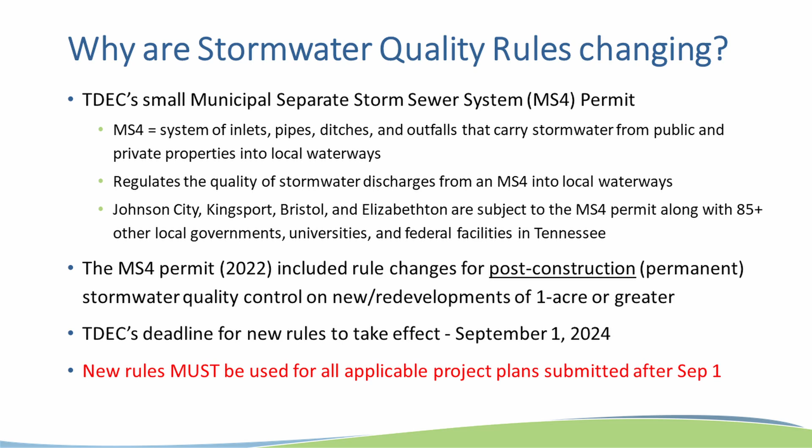So the 2022 permit included rule changes that bring us to this point. Those rule changes had to do with new developments and redevelopments that were an acre or greater of land disturbance. The deadline that TDEC set for the municipalities was September 1st to make those rule changes. I'm not sure that everyone met that September 1st deadline exactly, but generally those ordinances have been revised and adopted, and as of that adoption date, any plans that you submit after need to meet these new requirements that I'm going to show you today. So it might not be September 1st in every community - consult the community's ordinance or the community itself, and they'll let you know.

So the objectives of a stormwater ordinance in general are really to establish the local authority and the project applicability for who needs to manage stormwater. So you're going to see what projects are applicable to these requirements, what land disturbances are exempt. The ordinances also adopt by reference any other guidance or policies or things that are not placed in the ordinance - those are named in the ordinance. All of the ordinances for the jurisdictions in this room adopt by reference the Tennessee Construction General Permit.

Most ordinances refer to the permit for erosion and sediment control requirements. They refer to the Tennessee Erosion Control Handbook for how to design those erosion control measures, and then to the local SCM Water Quality manual, the one revised for stormwater quality and channel protection requirements. Your ordinances may also reference other manuals like public works standards or other handbooks for localized standards. So the purpose of an ordinance isn't necessarily telling you how to do everything, but telling you what you need to do and where to go to understand how to do it.

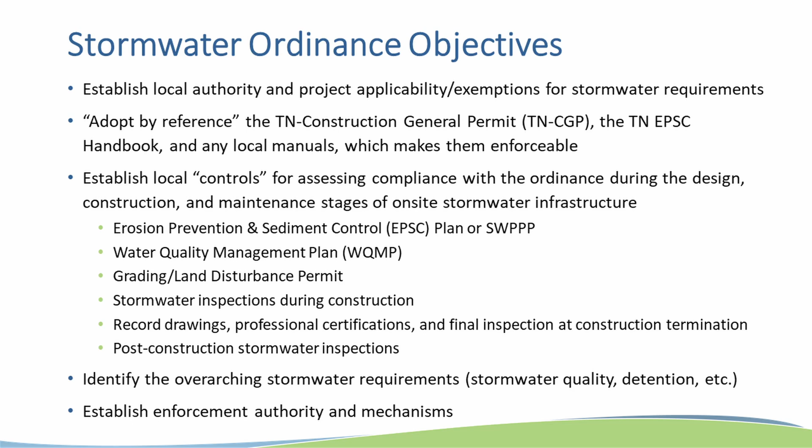Finally, and importantly, ordinances establish the enforcement mechanisms in case of failure to comply with the ordinance. Those are also required much more prescriptively by the 2022 MS4 permit now, so you may see a few changes on the compliance side as well.

When you look at a stormwater manual, whether it's the water quality SCM manual, public works standards, or what have you, that's where all the methods, calculations, equations, and design specifications really are. So it's going to explain what those design performance standards are, what the measuring stick is that you have to meet, and it's going to explain or reference the hydrologic and hydraulic methods you need to use to do that.

This water quality SCM manual doesn't provide a lot of typical engineering methodology, such as how to do NRCS runoff hydrograph generation. This manual assumes, like many other manuals, that as an engineer you can go to an engineering text and learn how to do that. It does, however, provide some information on stormwater quality volume calculation, which is typically not in an engineering text, not something we all learned in engineering school. So it will establish minimum specifications for the design of stormwater control measures, SCMs. I'll talk about SCMs a lot more in a minute.

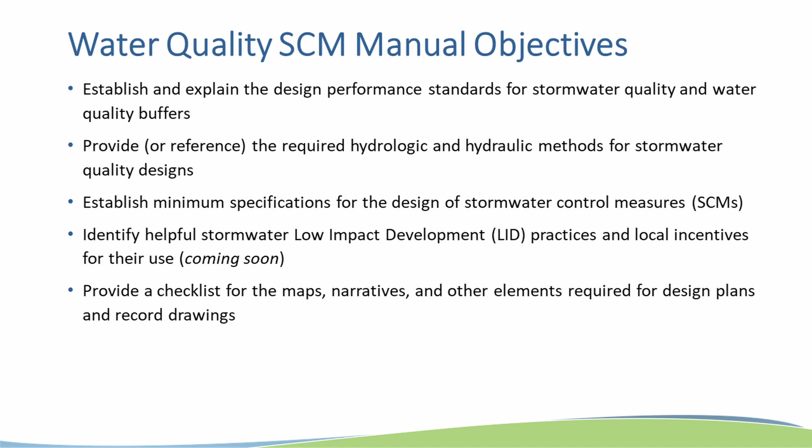It also talks about some helpful low-impact development practices and local incentives coming soon for those practices. Low-impact development practices, from a stormwater perspective, are ways that you can reduce the generation or reduce the volume that flows off of your site through site design planning measures and infiltration or capture and reuse practices. We'll talk about those a little more in a minute. The manual also provides checklists for the development of your plans, with a narrative on what to provide, how to provide it, what scale, and things like that. You'll find all of those things in the manual.

The new water quality SCM manual is simply a revision of the old water quality BMP manual. The state changed our terminology. A BMP no longer refers to a post-construction stormwater measure. The terminology stormwater control measure, or SCM, now refers to the post-construction stormwater facility you put out in the field. So it's a stormwater quality SCM manual. It deals only with water quality and channel protection, not detention. It's got the same table of contents as before. We revised only the sections that needed revision, as well as updated the SCM design requirements.

Still the same manual. You'll find it on your local websites, local government websites.

The typical regulatory framework for local stormwater rules is a city code of ordinances, parsed out by chapters or titles, with various pieces dealing with erosion and sediment control and the permitting associated with that, which then lead into post-construction stormwater management and water quality buffers. A lot of times the permitting will be cited close to the erosion control section of the ordinance, but will have an overarching requirement for that permit. That permit, usually a grading permit or a land disturbance permit, is typically what then leads into your permanent stormwater management and buffer requirements. So for every jurisdiction in the room, you're just getting one permit, land disturbance or grading, but under that permit you're typically satisfying requirements in all three of these areas.

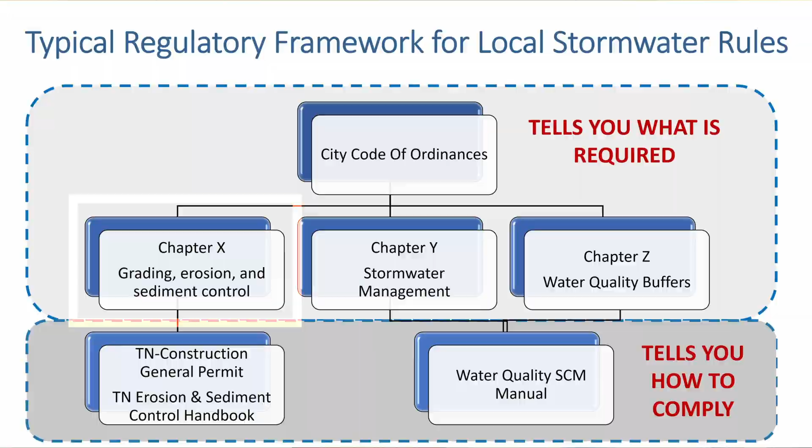Now, as far as local design standards, this table was in the old water quality BMP manual, and it's the same table in the new water quality SCM manual. Stormwater quality treatment for these four communities has been 80% TSS removal of the water quality volume since 2007, 2008. That has not changed; that standard is exactly the same. The state went after that standard, and that's now the state standard, 80% TSS removal. Downstream channel protection has been the runoff volume from the 1-year, 24-hour storm event, extended detention of that, and that has not changed. Your detention and extreme storm management requirements will vary by jurisdiction. Just go to the ordinances and the local standards, and they'll let you know what those are.

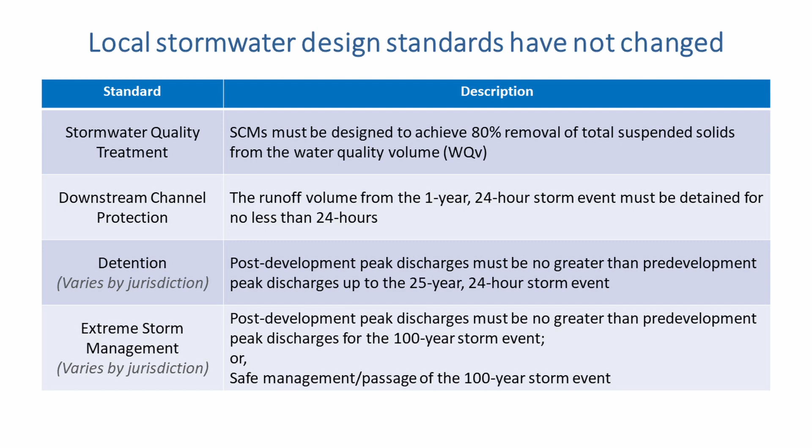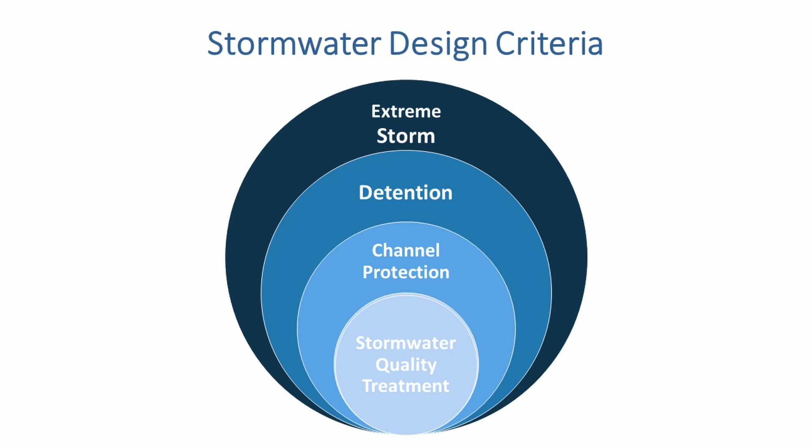This bullseye graphic was in the old manual, and it talks about how, if you choose to, you can nest your design compliance into a single SCM. That is still true, though not necessarily always the way you'll go depending on the project. The volume you control for stormwater treatment can also account for some of the volume you deal with for channel protection, and retaining those volumes can also be situated into your detention feature for flood control and extreme storm management. So that has not changed.

One thing that has changed under the new state permit is that the stormwater quality treatment volume changes depending upon the SCM you decide to use to control stormwater quality. It used to be we just managed 1.1 inches or thereabouts, typically through an extended detention pond with a water quality orifice, and maybe a grass channel upstream to get your 80% TSS removal. What's changing in this new manual is the amount of volume you have to control and the way you show compliance for that control. So let's get into that. We'll talk about stormwater quality treatment and channel protection standards, and some terminology—probably should have put this at the start.

Post-construction or permanent stormwater management is the removal or control of pollutants from stormwater after construction is complete. So construction's done, that business or residential area is occupied now for whatever it was created to do. We still have the requirement under Tennessee state law and under their permits to control stormwater quality from the smallest volume of water. That's called the water quality treatment volume.

Total suspended solids, or TSS, is the parameter the state chose to be an indicator for the reduction of pollutants in stormwater. That has been the indicator these 4 communities have used since 2007, 2008. The water quality volume is the required volume of water that must be controlled for stormwater treatment. That's not changed. The amount of what that volume is has changed.

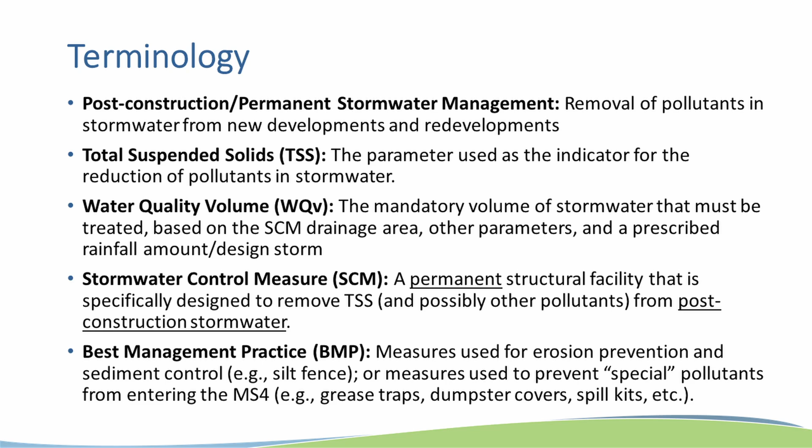As I said, stormwater control measure is now what we call the permanent stormwater quality facility that's on site. Best management practice is still a term that's out there. BMPs can be either erosion and sediment control measures, or when you're talking about permanent stormwater, for a special pollutant site, maybe you've got petroleum, fuel containers. A BMP would also be a measure to control or not expose those special pollutants to stormwater when it rains. So BMP now is changed a little bit to either stormwater control, erosion and sediment control, or a no exposure or point source control - a dumpster cover, an enclosed trash facility, an enclosed transfer facility, things like that.

So before I tell you about the new way, I want to remind you about the old way. For stormwater compliance, the old method, our performance standard, was 80% TSS removal of pollutants from the water quality volume. So removal of TSS from the water quality volume.

We had this equation, the water quality volume equation that we used, where P is the rainfall depth or precipitation depth - that was 1.1 inches or thereabouts. RV is a factor that has to do with the imperviousness of a site, kind of like a curve number, or a C factor in the rational method. I in the RV equation was your impervious percentage over the whole site.

And then impervious percentage in the SCM drainage area. And A was the drainage area to the SCM.

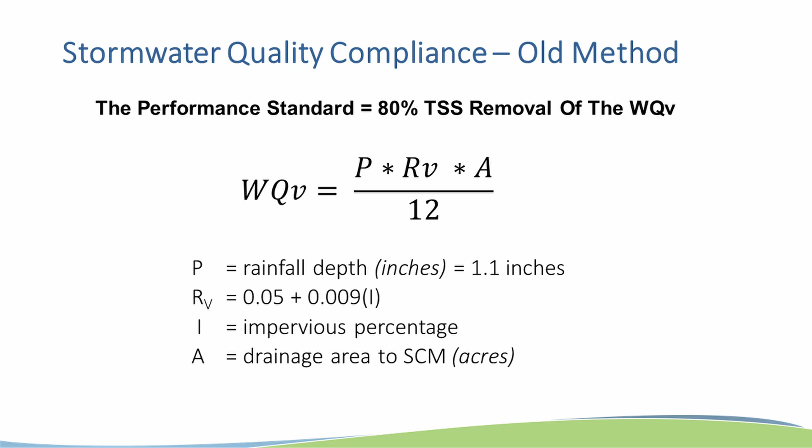So if you had 2 SCMs on a site, you would work this out twice, one for each drainage area, where area A would be the drainage area to SCM1 and SCM2, and I would be the impervious percentage of the drainage area to SCM1, and then impervious percentage for SCM2. So that was the required volume you had to meet.

And then you designed SCMs, or BMPs, to control that volume of water to 80% TSS removal. So what that looked like would be, let's say, an extended detention pond that controlled that smallest volume, that 1.1 inches of rain, the water quality volume. That extended detention pond got you maybe 60% TSS removal. So more than likely you had to put a grass channel or something upstream to get you to 80% TSS removal. But your pond profile tended to look something like this, where you had water quality volume, channel protection volume for the 1-year storm event, and then your detention volumes all up the riser.

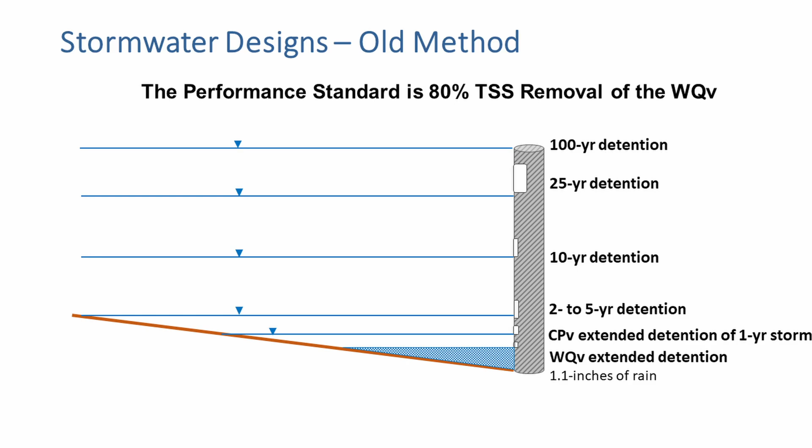So some of that has changed. As of September, that design standard of 80% TSS removal of the water quality treatment volume is the same. Most of the SCMs that were in the old manual are now in the new manual. Things that you're not going to see are things like grass channels. And I'll explain why in a few minutes.

And then a lot of the policies that were in the water quality SCM manual have stayed the same. As I said, the design specifications have changed a little bit, but by and large I think you're going to see that they're pretty much the same. The checklist, all of those things are still in there.

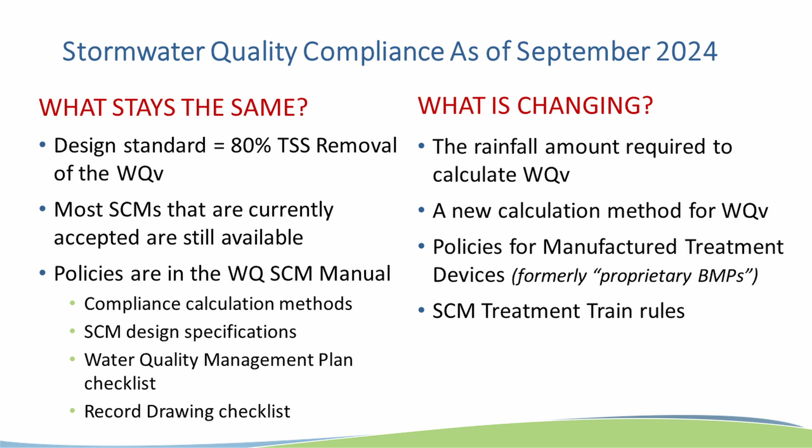What's changing is the rainfall amount that is required to calculate that water quality treatment volume. There is a new calculation method in addition to that water quality volume equation for determining the water quality volume. There are new policies for what we used to call proprietary BMPs - they're now called manufactured treatment devices. And there are new requirements for SCM treatment trains if you get to the point of needing one. Most of you, I think, will not get to that point. So the main table you're going to be looking at in the new manual is the SCM treatment table.

The SCMs are now divided into different groups. There's 4 different groups, and each group has a different treatment mechanism, so how it treats stormwater quality. Group 1 treats stormwater quality.

These are the true green infrastructure or low impact development SCMs, where you've got infiltration, evapotranspiration, or rainfall harvesting and reuse. So things like a cistern or a bioretention area without an underdrain. What you're doing is capturing that water quality volume and you're not allowing it off the site.

That's group 1. Group 2 is still green infrastructure, still considered LID. It uses biologically active filtration, but it has an underdrain. So this would be a bioretention area where you don't have the capacity or the soils to infiltrate. So you're going to biofilter and evapotranspire that water in the bioretention area, but that water quality volume you treated is going to go out through an underdrain to the storm sewer system. So it's cleaner water going out.

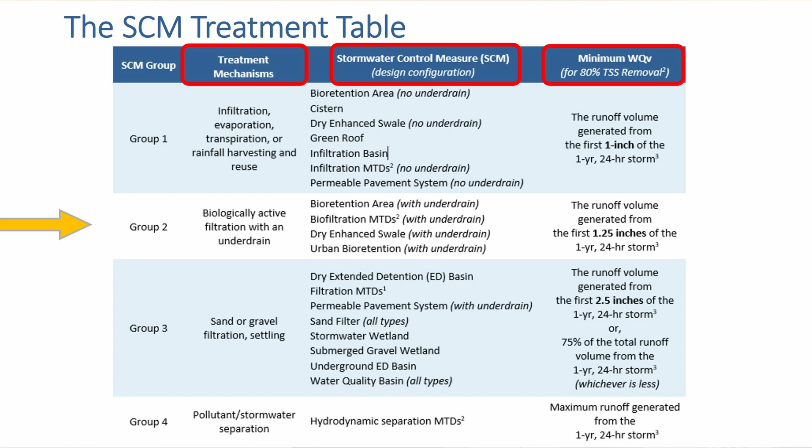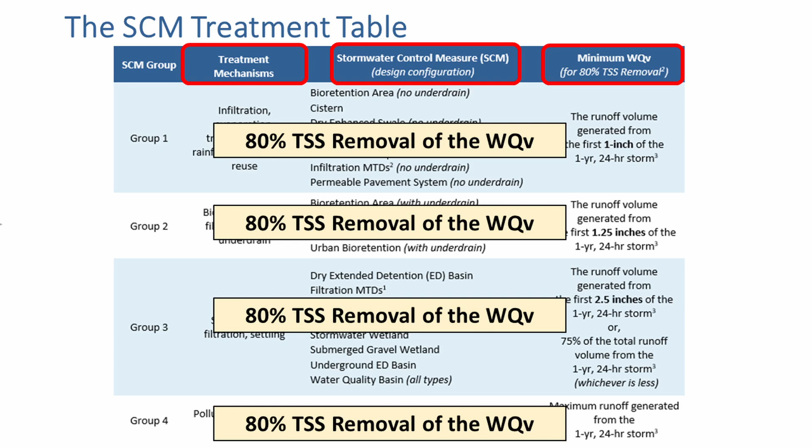So if you read this table, each row gives you 80% TSS removal. So now if you pick a dry extended detention basin, as long as you size it to one of these two choices for the water quality volume, then you're meeting 80% TSS removal. You don't need to do anything else for water quality. So you read it by row. Each row constitutes 80% TSS removal. The water quality volume and the type of SCM, that's what is varying.

Looking again at the old method, the old way since 2008 of doing this, we would have put that dry extended detention pond and sized it for 1.1 inches, but that didn't give us a total TSS removal of 80%. We had to put something upstream of it, so maybe we chose a grass channel or a hydrodynamic separator or something like that. We also sized that for that same water quality volume. We put these in series, and out the end, you had 80% TSS removal.

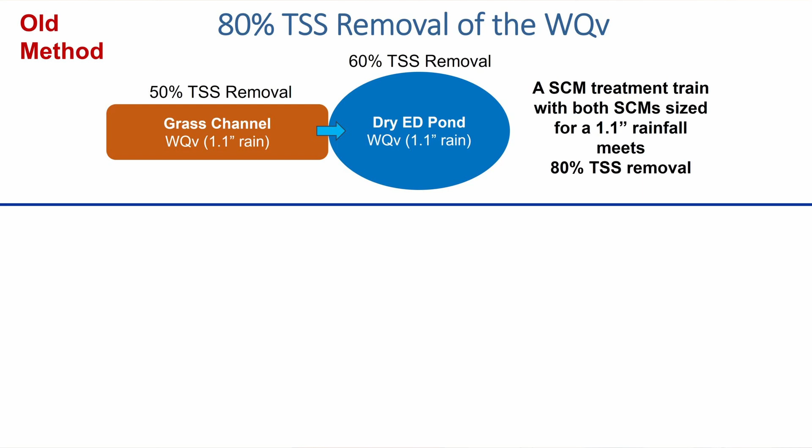That's not the way to do it anymore. What you do now is you size that dry extended detention pond for the water quality volume of 2.5 inches of rainfall, or 75% of the volume from the one-year storm, and you've got 80% TSS removal. You don't have to stack a treatment train anymore.

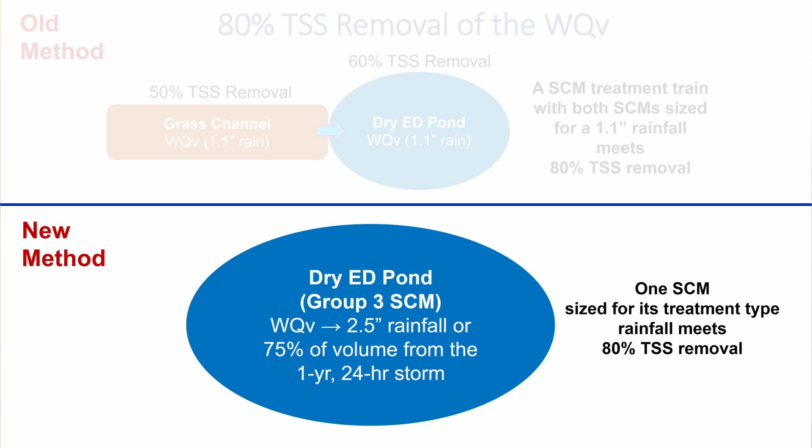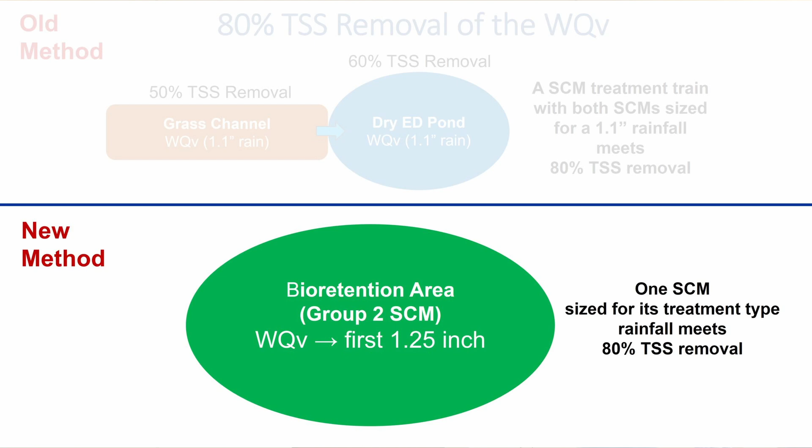However, if you decide that's a bioretention area and you want that instead of an extended detention pond, then you only have to control the first 1.25 inches to get 80% TSS removal. Now, you still have to do channel protection and detention downstream of that bioretention area, but in your detention pond that's downstream, you don't have to worry about the water quality volume. You've already dealt with that through your bioretention area. Does everyone understand that?

That's the big change. It takes a little getting used to because you're used to thinking of trying to get 80% by finagling your SCMs. Now you just choose one SCM, and if you can size it properly and design it according to the manual, you're good to go.

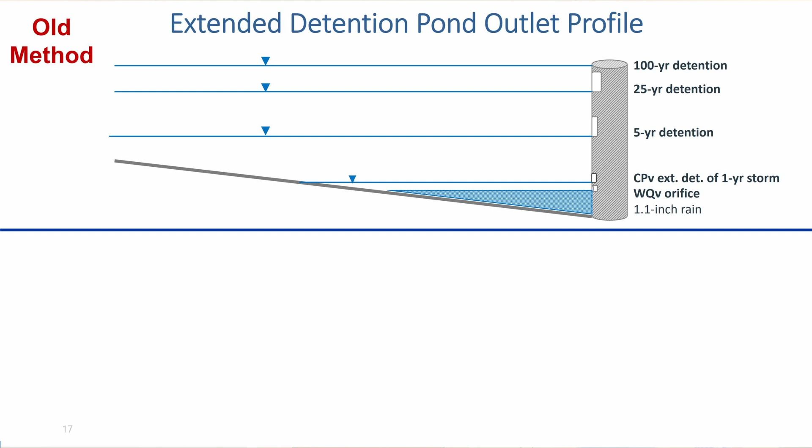So this takes our old extended detention pond profile, and it does change it, because we have a lot more water now in an extended detention pond that we're controlling for water quality volume.

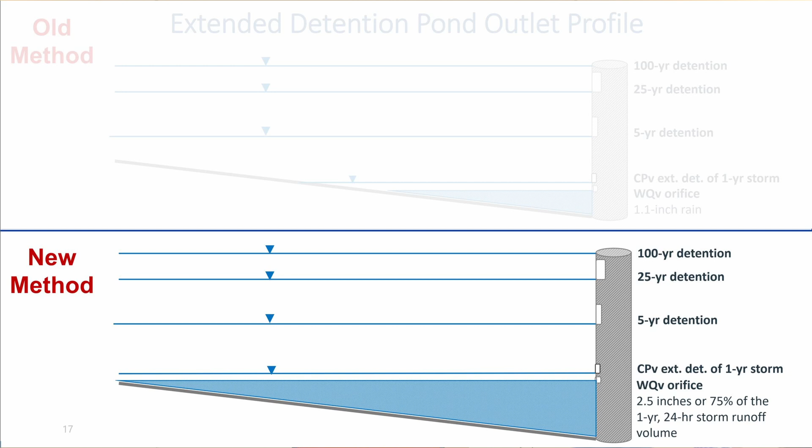Now, backing up a little, the reason TDEC did this is because not all SCMs are created the same. They're not all as efficient as each other in removing pollutants from stormwater.

The SCMs in a group 1 situation, where none of the water quality volume runs off site, are the most efficient. You've got basically 100% pollutant removal since that volume isn't going off site. In group 2, they're very efficient, so you only need to do 1.25 inches and you get that 80% TSS removal. As you drop down to groups 3 and 4, these are a lot less efficient.

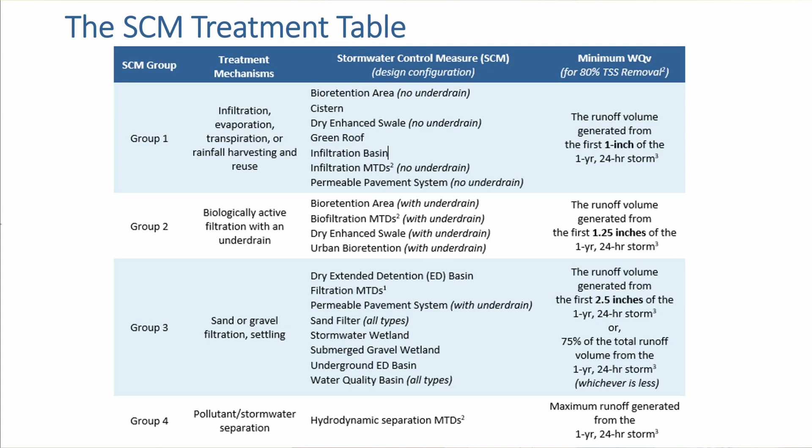So instead of dealing with different pollutant removal percentages, what TDEC did was say, okay, we'll just make you control a larger volume, so that controlling a large volume in a less efficient SCM is roughly equivalent to controlling a small volume in more efficient SCMs. That's what TDEC was thinking in order to come up with this scenario. It just flips on its head how you get to 80% TSS removal.

Okay, so you still have the option of using that water quality volume. That does have a name, by the way — it's called the simple method. The changes are here in red, kind of hard to see. You use the rainfall depth from the treatment table to determine your P, your precipitation depth. The RV is still the same, the imperviousness is still the same.

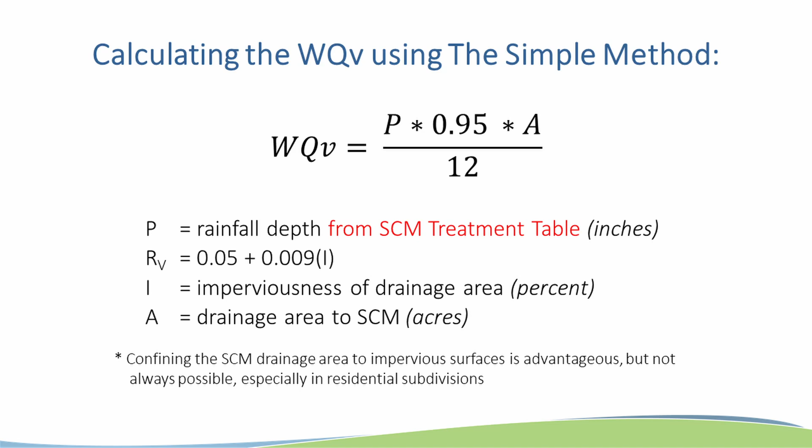One thing the permit does, and that the new manual does, is encourage you to try to keep your drainage area to the SCM 100% impervious. On a commercial site that tends to be easier to do than on a residential subdivision, since you've got a lot of intermixed stormwater coming off pervious and impervious areas. But if your drainage area can be confined simply to impervious area, then your imperviousness is 100%, and the equation works out a little easier.

That's also a change the permit allowed — just controlling the impervious surfaces on your site from a stormwater quality perspective. Now, as an engineer, if that SCM is receiving stormwater from both pervious and impervious areas, then your equation needs to include both, because it needs to be sized for the drainage volume it's receiving, from a water quality perspective on up through detention. So if you have pervious area going in, make sure that's reflected in this equation.

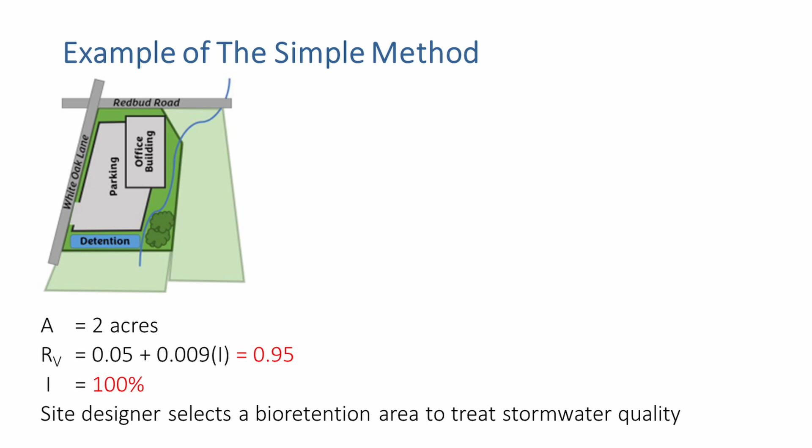An example of that: we have a very simple development here, an office building and a parking lot. For example purposes, let's say I can get everything over to a bioretention area here, and I'm not running off any pervious area. So my area is 2 acres, I have 100% imperviousness, so my RV is 0.95. I've selected that group 2 bioretention area.

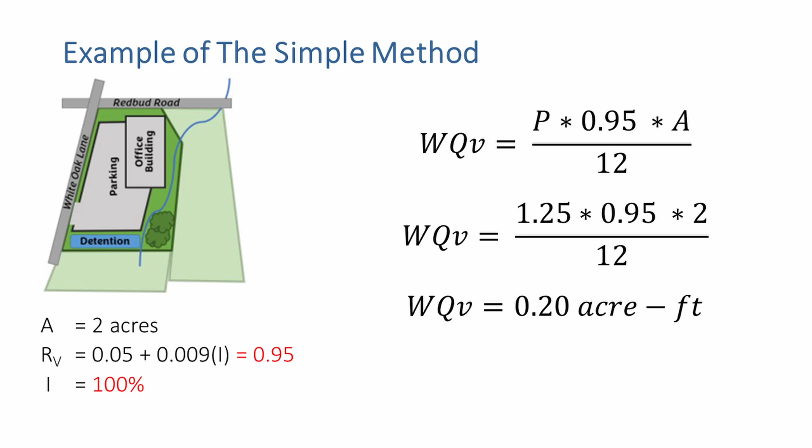I'm going to say it has an underdrain, so I know I need to calculate my water quality volume based on the first 1.25 inches of rainfall. I stick my 1.25 inches into that equation. We're not really dealing with timing in this method — that's where the simple method kind of breaks down, since it's technically the first amount of runoff you'd see, but we're not dealing with the timing of the stormwater here. I've calculated my water quality volume to be 0.2 acre-feet, okay.

Another thing we've been doing all along when using the simple method is making sure we understand the water quality peak discharge, the QWQ parameter. That's been in the manual for a long time, but I've heard from a lot of engineers who didn't realize they had to do that. You do have to do that — you have to determine the peak flow from your water quality event, or the peak flow from that water quality volume, so you can size the different flow diverters, outlets, inlets, and so on for that SCM.

You'll also need to route that peak flow through the smallest portion of the SCM, to make sure it won't be overwhelmed by your water quality volume. There is a full calculation method in Chapter 3 of the Water Quality SCM Manual.

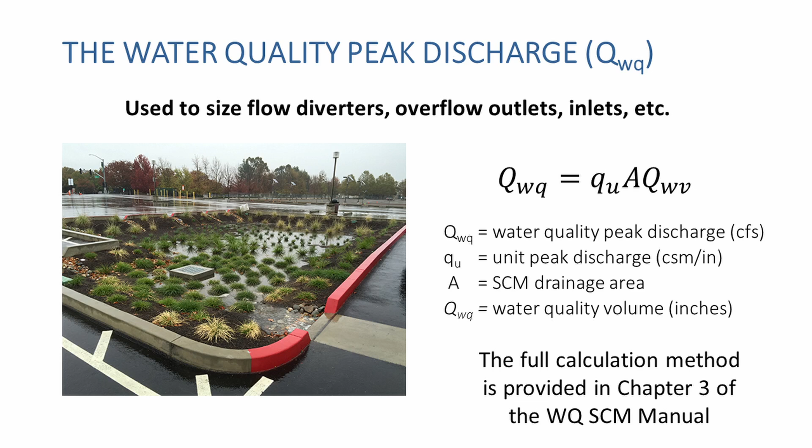It's not changed from the method that was there previously. I just wanted to point this out and make sure you are aware you need to determine the water quality peak flow and make sure your SCM is sized for that peak flow. Even if it's an offline SCM, it's got to be able to handle the water coming into it.

There are more equations than just that one. That's the ending equation, but if you go in the manual, it'll show you how to come up with all those parameters.

There is a second method to determine the water quality volume and the water quality peak flow. This is a method you're all familiar with, the NRCS hydrograph method. So you're going to do your typical NRCS hydrology, finding curve numbers, time of concentration, etc. Your design storm is that 1-year storm.

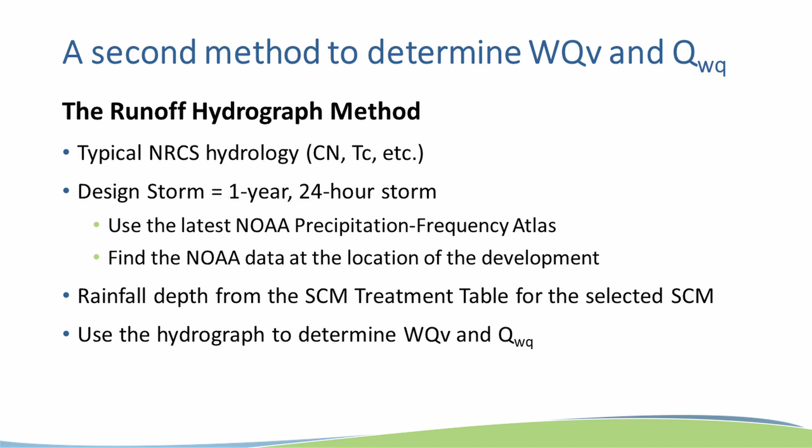You have to use the latest NOAA precipitation frequency atlas, it's number 14 right now for that data. In Johnson City, for all the other storms that you're controlling, you're going to use Technical Paper 40. But for all the other jurisdictions, let me back up - in Johnson City, you have to use NOAA for the water quality treatment volume, but Technical Paper 40 for all of the other design requirements.

In the other communities, you're using NOAA, or they'll let you know if there's something different. But the state mandates that the NOAA rainfall distribution or the NOAA rainfall information be used for the water quality volume.

You're going to get that rainfall depth from the SCM treatment table for the selected SCM that you have, and you'll use the hydrograph that's generated to determine your water quality treatment volume and your peak flow.

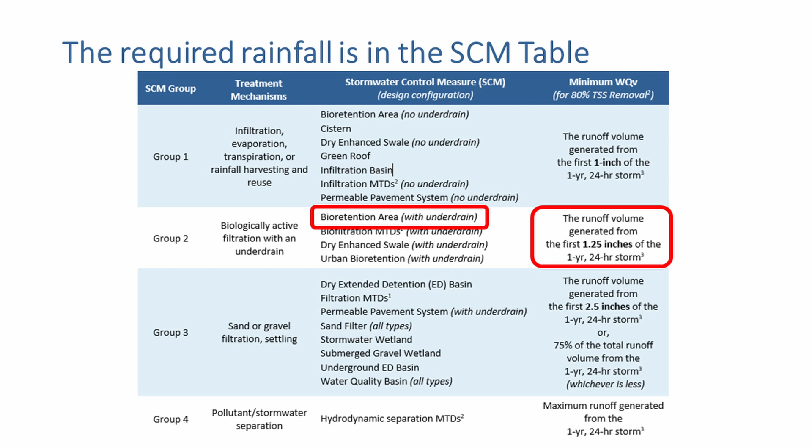So using that same example, the design professional is going to go ahead and develop their required NRCS parameters, and then we'll just plug that into our software using the NRCS TR55 method to come up with our runoff hydrograph. I'm going to say we've gone ahead and chosen that same bioretention area with an underdrain, a Group 2 SCM.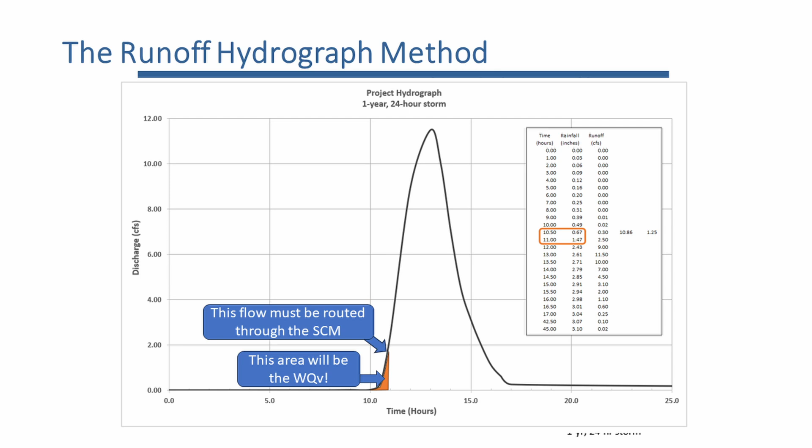So the volume under that tiny little slice is your water quality volume. The peak discharge is the peak right there. So that's the flow that must be routed through the SCM and used to size diverters and things like that. The design specifications in your manual will tell you how to size what.

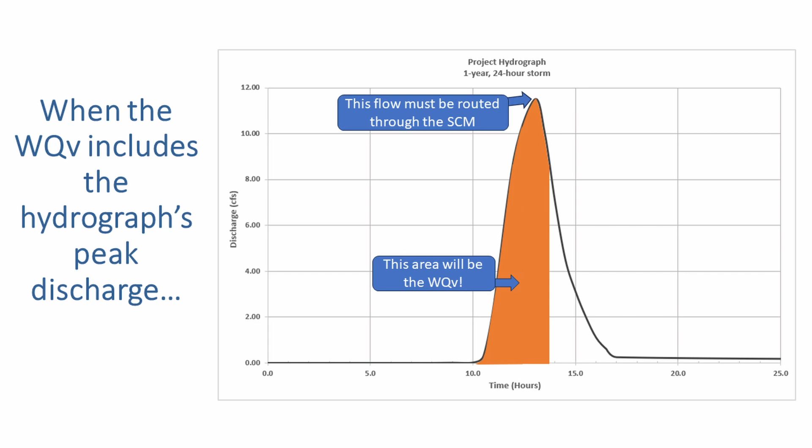So when the water quality volume passes, the timing of it passes the peak of the 1-year storm hydrograph, then the volume under that larger area is the water quality volume, and the peak of the hydrograph is what must be routed. So it just depends on what's going on your site to know whether you're past peak or before peak. But you have to pay attention to whether you're past or before in order to understand what your water quality peak flow is.

So this is the way that TDEC prefers. We allow both ways in these communities. Just know that if TDEC ever were to get involved, they'd probably want to see this. I don't know why that would be, but...

Now, one thing I want to point out, you've probably already noticed, Group 3 SCMs - extended detention ponds, permeable pavements, sand filters, wetlands, your storage features - they're all considered Group 3 SCMs, and you have a choice. You can either design that for the first 2.5 inches of that 1-year storm or for 75% of the total volume of that storm. Just do whichever you prefer. Typically, that's going to be whatever is less.

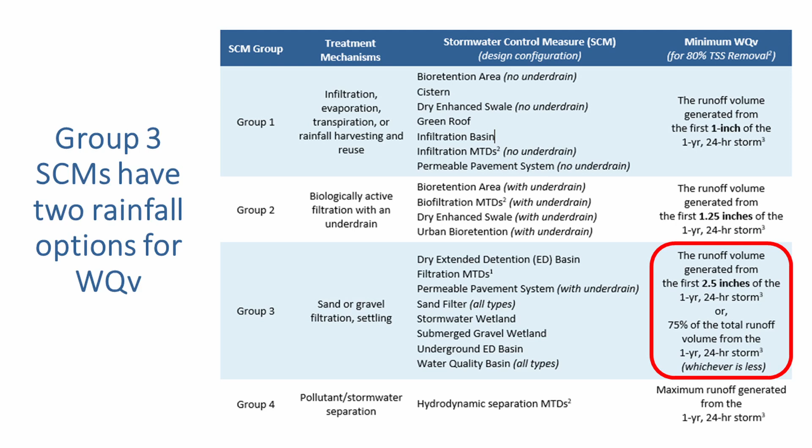So again, let's say you chose to use 2.5 inches and it comes out with this. You've got that volume that you need to determine for the water quality volume and then the peak flow. But let's say you decide to use 75% of the 1-year storm, then you're going to get the volume, the total runoff volume under the hydrograph. So all of that, but just multiply it by 0.75. So 75% of that volume then is your water quality volume.

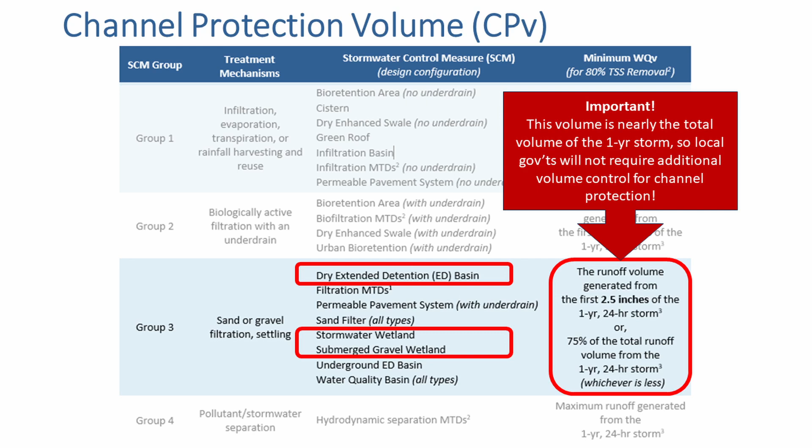A little give-back you're getting from the Tri-Cities communities is that they recognize the volume you're controlling, especially when working with storage features like a stormwater wetland, extended detention pond, or submerged gravel wetland. By the time you've done water quality volume, you're about as close as you're going to get to your channel protection volume, it's very close in size. So if you're using a storage feature for water quality volume and have that capacity, they'll call it even and you've met your channel protection requirement for that SCM. If you're using other SCMs not in that box, they won't provide channel protection, so you've got to handle channel protection in your detention pond.

There are a couple other key changes. The first is that Group 2 SCMs are the green infrastructure SCMs that have an underdrain. Because of the propensity for sinkhole formation in this area, most of the time if you're doing an infiltration SCM, you're going to have an underdrain - it's a matter of safety. So more than likely, if you want to do green infrastructure, you'll be in Group 2 more often than Group 1.

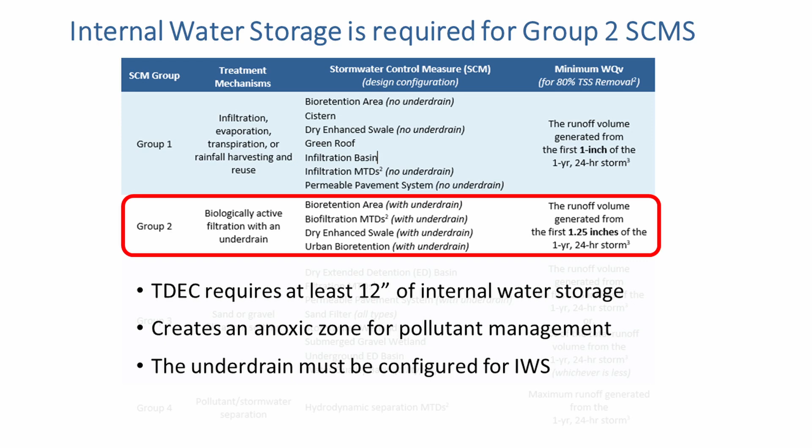If you choose a Group 2 SCM, TDEC requires at least 12 inches of internal water storage in that SCM before it's discharged. That creates an anoxic zone that helps with pollutant management, particularly nitrogen and phosphorus. I know those aren't the pollutants we're controlling here, but this is a permit requirement these jurisdictions have to pass on. So anything that's a Group 2 SCM has to be designed with at least 12 inches of internal water storage, and the underdrain needs to be configured for that.

There are probably more underdrain configurations than what I'll show today, particularly from manufactured treatment device vendors who may have inventive ways to do this. But if you're constructing a bioretention area yourselves, there are typically two general ways to provide that internal water storage. The first is with an upturned elbow underdrain.

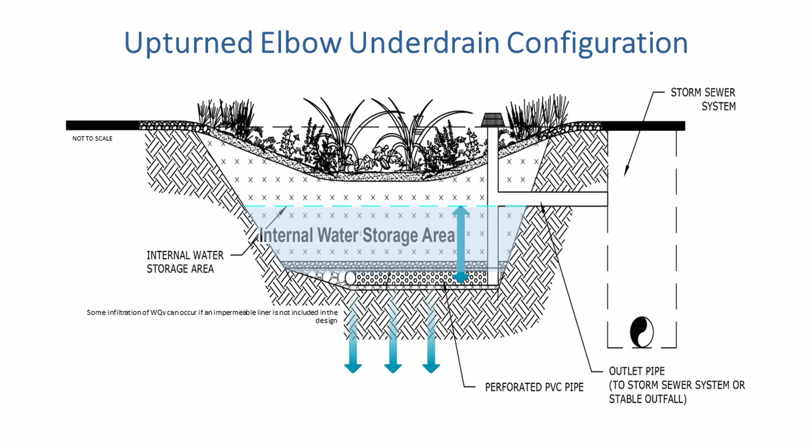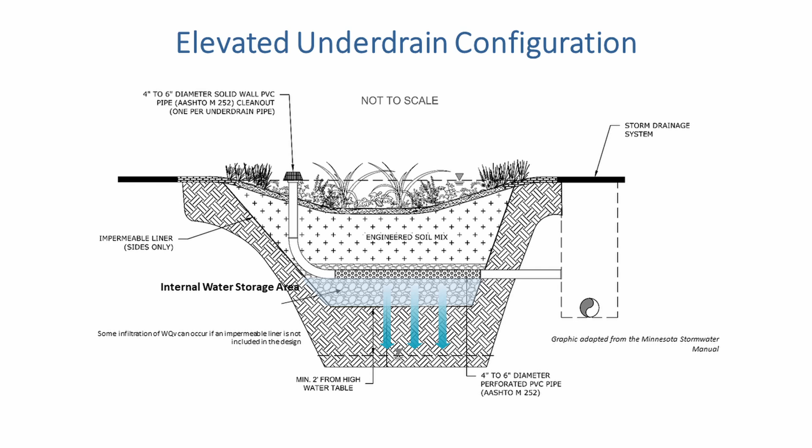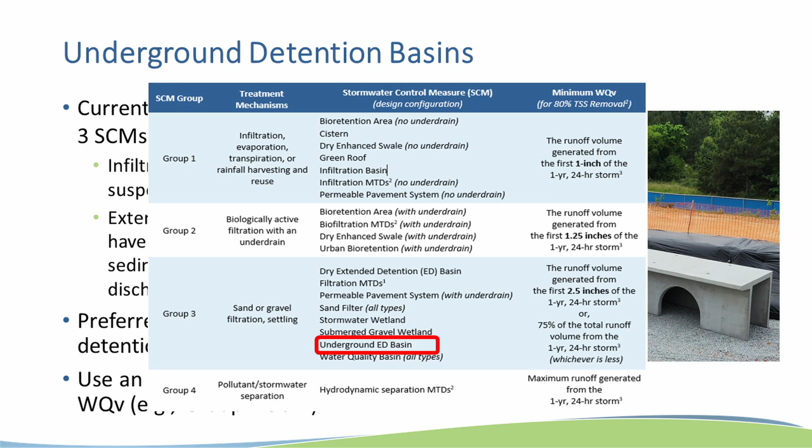Nobody wants to prevent underground detention basins from going in, but there's a lot of talk in the stormwater quality world about how much stormwater quality they can actually provide. You've got open bottom concepts that a lot of vendors can sell, but these are typically put on a compressed or compacted pad, and over time they're going to have some sediment come into them. So their infiltration capability over time is pretty suspect.

If you do extended detention designs, I've got a number of manuals that I've seen that are very concerned about sediment resuspension, because the splashing around and washing in the underground basin can resuspend sediment and just send dirty water out the end. So there's some discussion that needs to happen with the local governments between me and them, and we'll figure that out.

And let you know when there is a revision to the manual that deals with this. My personal opinion is the preferred use for an underground detention basin is for detention, and then there are small footprint SCMs that can be put just upstream of that basin that you can deal with your water quality volume on. So that's not in the manual. I'll talk with them and it'll be revised. Just know that's a conflict in the manual right now.

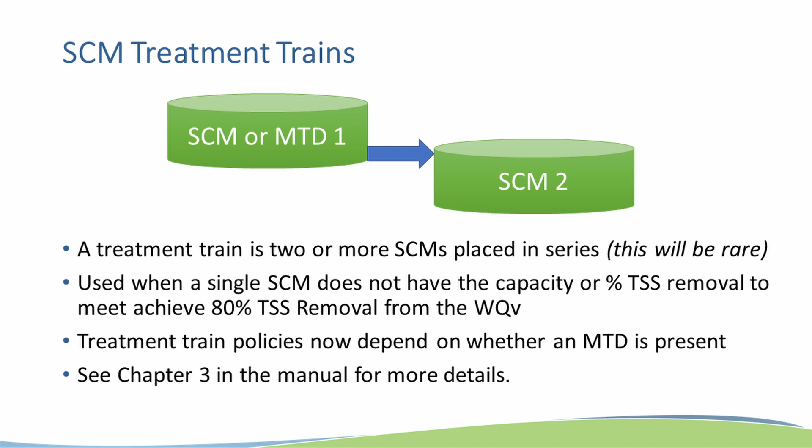There are new rules surrounding treatment trains. The rules have to do with whether there is an MTD, a manufactured treatment device, in that treatment train or not. All of that is in the manual - it's in both Chapter 3 and in the design specification for manufactured treatment devices. So just know that if you're inclined to go down the road of SCM treatment trains, keep an eye on the manual because there are some new things you need to be aware of.

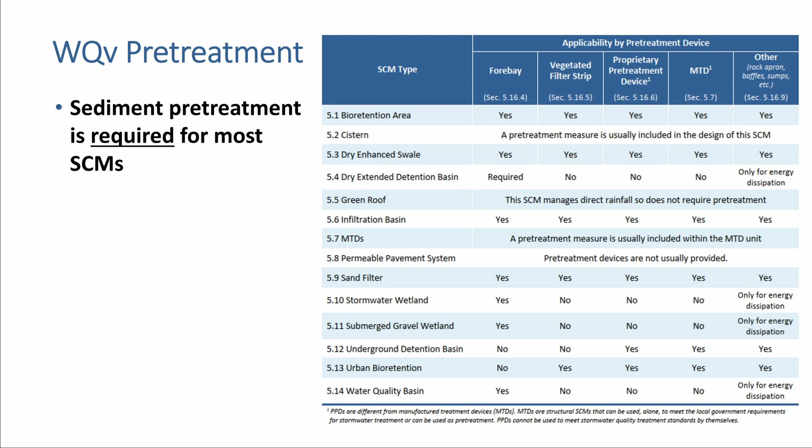Water quality volume pretreatment is required for most SCMs, and this is a table in the manual, in the design specification section, that lists the SCMs and what types of pretreatment are allowed for each. Just know that for storage SCMs like a dry extended detention basin, a wetland, or a water quality basin, pretreatment must be done via the state requirement using a sediment forebay. So you can no longer pretreat for a detention pond with a hydrodynamic separator - you have to use a sediment forebay. That's the state's requirement for those particular SCMs.

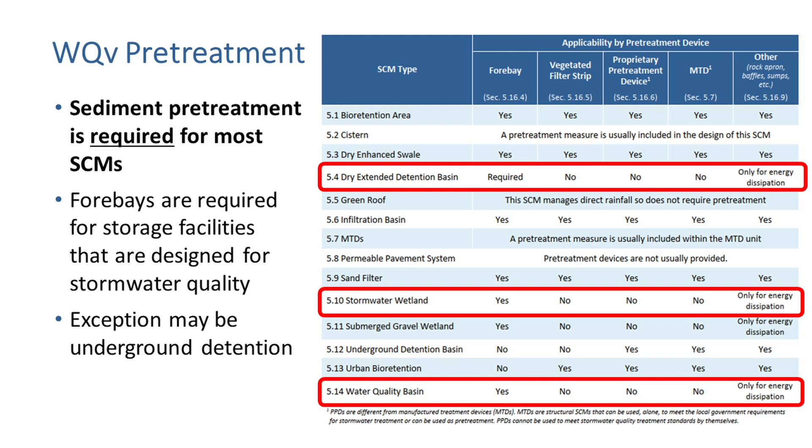And the exception I put - maybe underground detention - we'll just have to work that out. That's because of that conflict I mentioned, that's why there's an exception there. Just wait for us to catch up with that and we'll let you know. So that was my discussion on stormwater quality compliance and channel protection. Are there any questions? Not too bad.

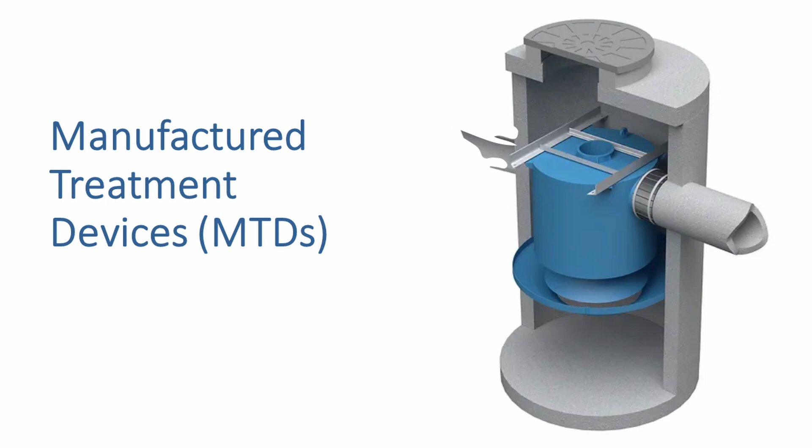All right, I'm going to move on to manufactured treatment devices. So here we have that SCM treatment table again, and I want you to notice that there are manufactured treatment devices in every group, okay? So no more are we just referring to hydrodynamic separation.

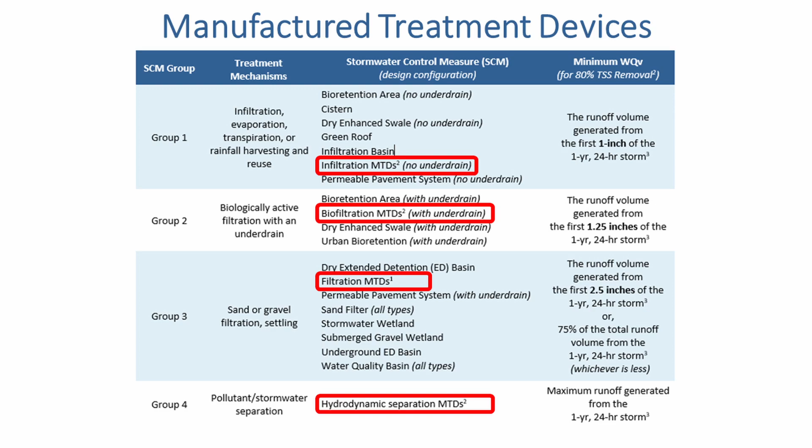We've got filtration MTDs in group 3, biofiltration MTDs in group 2, and things that infiltrate without an underdrain in group 1. I personally have not seen a group 1 MTD, and I've talked to a number of MTD vendors, and they haven't seen that either. So I imagine they'll come out someday, but group 1 doesn't currently have any MTDs that are certified. I'll get into the certification in a minute.

Group 2 MTDs - you've probably seen these kind of Filterra or tree boxes that are out there. These are really pretty nice features, and they work by biologically active filtration. There's plant uptake, evapotranspiration, engineered media, and the media will biofiltrate the water that comes through them. Just remember that because they're a group 2 SCM, you need to have that 12 inches of internal water storage, so just work with your MTD manufacturer or vendor to provide that. I know they can do it - that doesn't seem to be a problem for them.

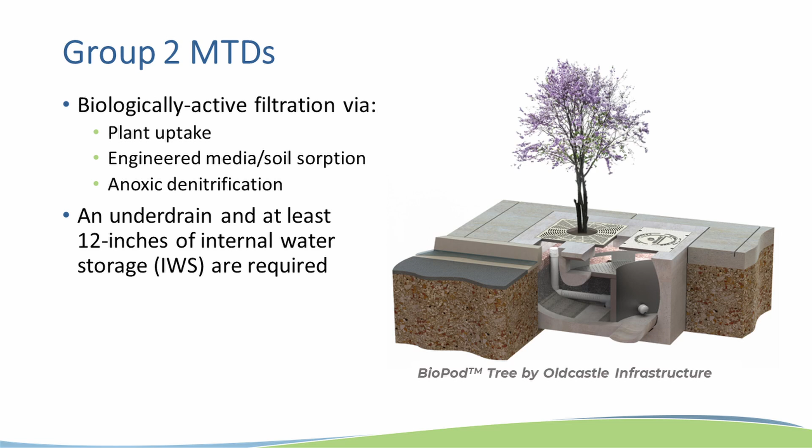Water that comes in is typically pretreated within the unit, so you don't have to design anything else. There is the treatment area, and for a Group 2, that's an engineered media. There is an outlet, and there is a bypass for higher flows than the water quality peak flow.

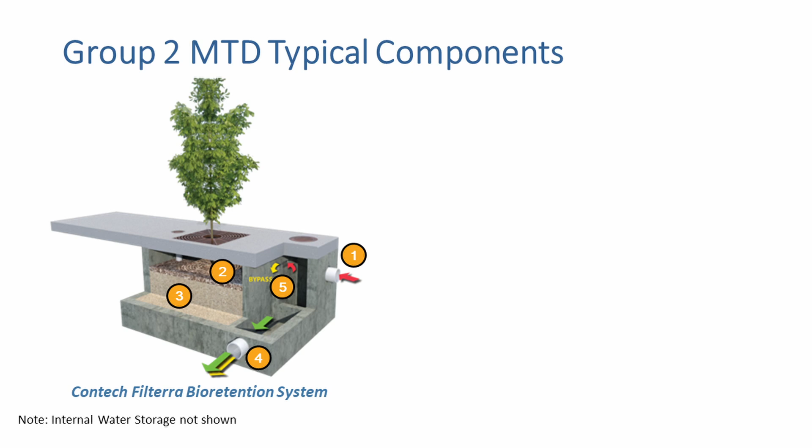This would all be designed for the water quality volume and the water quality peak flow, and then what is sent out of it, whether it's bypassed or treated water, goes to the stormwater system and the detention pond that's downstream. Here's another type of Group 2 MTD.

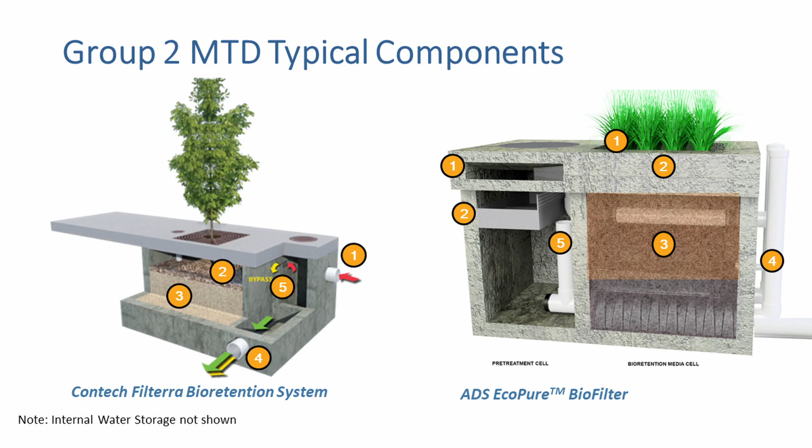It's a very similar concept, just different plants. Water enters through a curb cut or a curb inlet or through the top. It gets pre-treated. Here's a baffle box, gross solids and a litter box that catches the pre-treated water, goes through the engineered media. There's an outlet. There is also a bypass overflow. So those are Group 2 MTDs.

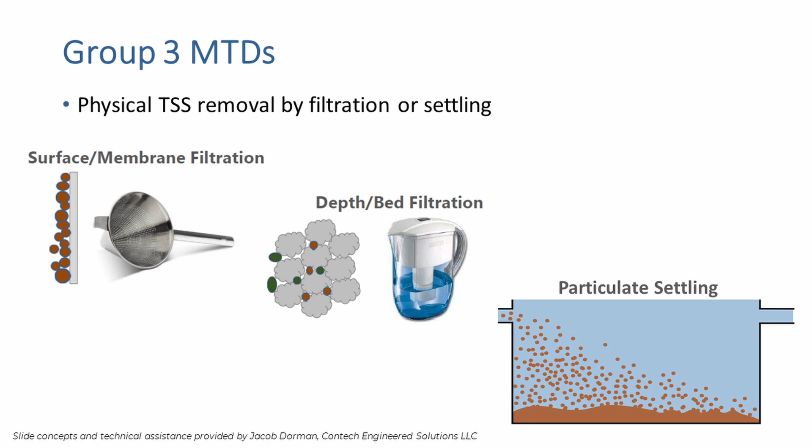Group 3 MTDs physically remove pollutants. So that's what we're looking for in a Group 3, whether it's by settling or filtration. It's physically removing the pollutants that come in.

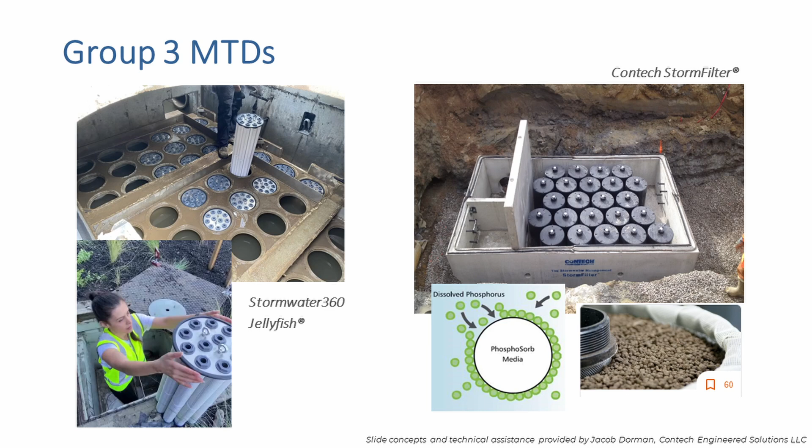You're probably familiar with these. These are like cartridge filter units, and the wrap on the unit is what filters the water. There are also the kind that within the unit there is a media that is tailored to the type of pollutant you're trying to capture. So there's different types of media, and by the time the water goes through the filter and through the media, cleaner water comes out and goes out the rest of the system. So those are Group 3 MTDs.

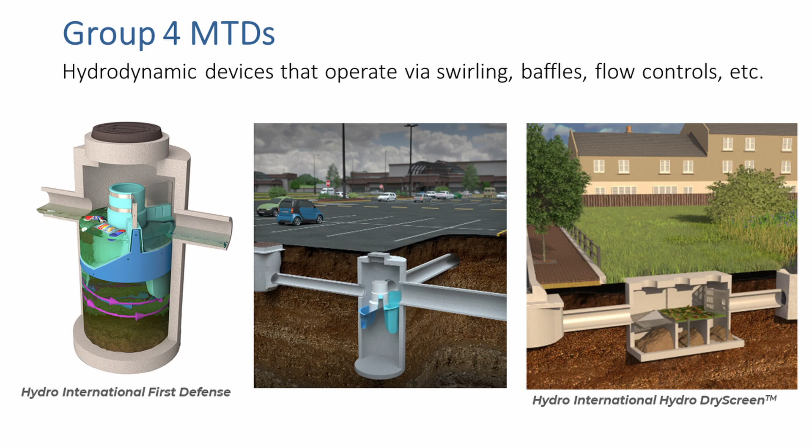Then Group 4 MTDs are the ones we all know and love, the hydrodynamic separators. Again, these MTDs, just like Group 3 and Group 2, have pre-treatment components. They have inlets, outlets. They should be able to be designed to handle all the flows that are intended to go through there.

So the key policy for MTDs, and I think some of the jurisdictions in this room had this policy already, but now it's official at the state level, is there needs to be some kind of industry-wide certification of pollutant removal for the MTDs. And since the New Jersey Department of Environmental Protection has been doing this for a while, that is the certification we're looking for, for these cities that are in the room today.

So when you use an MTD for primary treatment, as your primary treatment SCM, it needs to be certified at 80% TSS removal from NJDEP. Now, NJDEP certifies MTDs at either 80% or 50%. Unfortunately, the 50% are all the hydrodynamic separators. So if you want to use a hydrodynamic separator, right now there is not one out there that gets 80% TSS removal. You're welcome to use it for pretreatment, but you're going to need another SCM, whether it's in a pretreatment treatment train or you're just using it for pretreatment upstream of, say, a bioretention area or something like that.

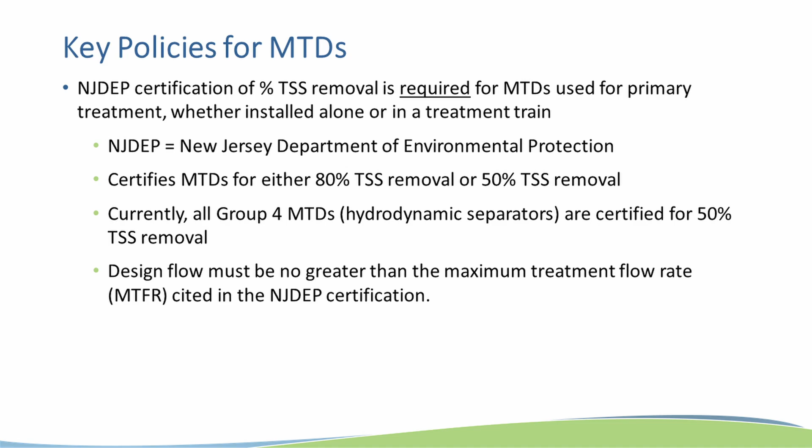The design flow must be no greater than the maximum treatment flow rate that's cited in the NJDEP certification. I'll show you where that is in a minute. So key policy: it has to be NJDEP certified if it's your main treatment SCM.

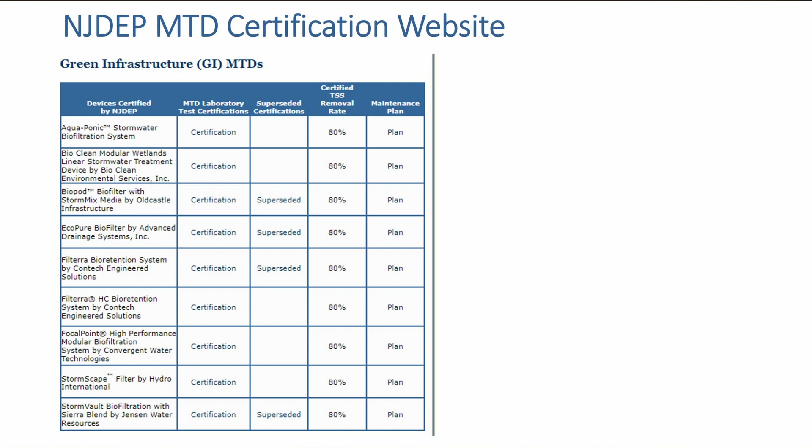This is a screen capture of the NJDEP MTD certification website. They have separate tables for green infrastructure MTDs, and these are all Group 2 MTDs. They have some sort of an underdrain and biofiltration system. Then Group 3 and 4 MTDs are called MTDs not considered green infrastructure by NJDEP, and there's a lot of them. I don't even have them all on the screen here, but there's a ton that are certified. You can see the certification here, the pollutant removal percentage here.

Could be another hydrodynamic separator, could be another biofiltration unit, whatever, but you cannot exceed the maximum treatment flow rate, because that is what this 80% TSS removal is certified for, up to that flow rate, okay?

The nice thing about NJDEP as well, this letter will be given, you need to print it out or PDF it and turn it in with your water quality management plan to show that you've got a certified MTD.

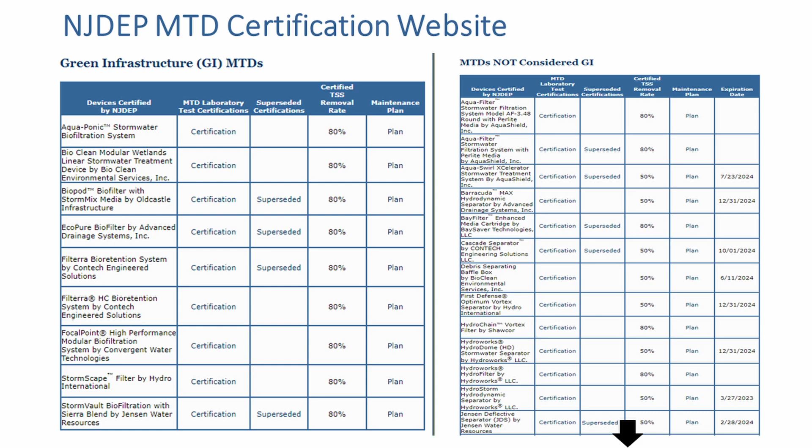And the nice thing about the NJDEP website is almost all of the MTDs also have their maintenance manual up on that website as well. So typically when you see this, a lot of the things that say plan here, those are the maintenance plans. So you would click on that. There's your MTD maintenance plan, and you can just include that with your water quality management plan as well.

Okay, so back to the policies. NJDEP certification is required for MTDs used for primary treatment, whether alone or in a treatment train. It is not required when you're just using an MTD for pre-treatment purposes. So if you've got an SCM that handles the whole water quality volume, say a sand filter, but you haven't designed that pre-treatment for that sand filter yet, you're more than welcome to use a hydrodynamic separator for that. You don't need NJDEP certification.

The MTD that is approved on the water quality management plan must be the same MTD that is installed on site. So if you need to make a field change, you need to go back to your local government for approval of that MTD substitution. And we know that happens. There is a method or a process for that, but the state requires permitted local governments to make sure that their approved plan is adhered to. If it's not, it's a liability for the local government. So the local government is kind of passing that adherence down to you: adhere to this plan, and where you can't, we want to know about it so that we can document we've approved the substitution.

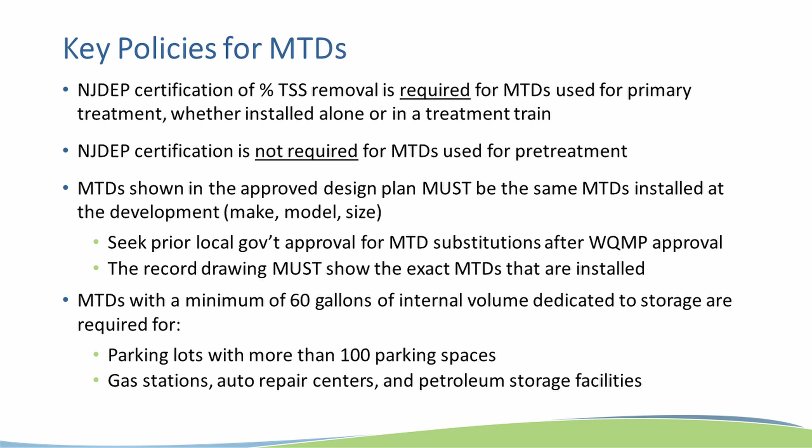And then another addition, I think a number of you were doing this already, is that MTDs that are placed in parking lots with more than 100 parking spaces, or for land uses that have petroleum storage or could have petroleum issues, the MTD needs to have a minimum of 60 gallons of internal volume dedicated to storage. And that's to try and prevent petroleum products from getting out into the full MS4 system where it becomes a larger problem, okay?

Any questions on manufactured treatment devices? And this is a manufactured treatment device, it's a packaged urban bioretention area. So there's a lot of new things out there that are pretty nice.

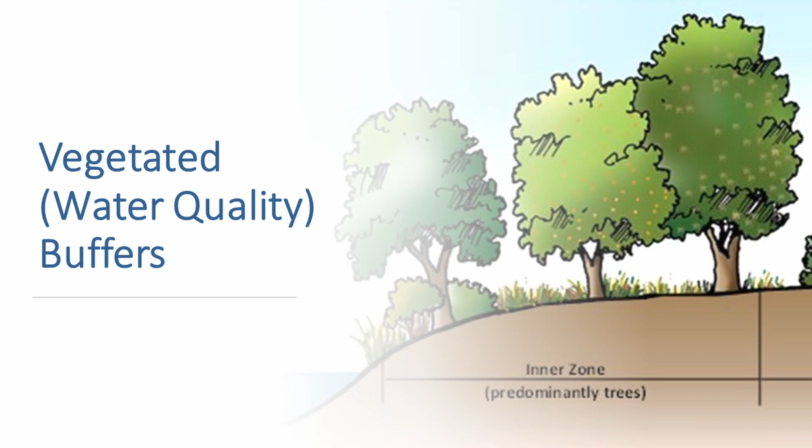Okay, well, I'm going to move on to vegetated buffers, an overview of the rule changes. So what's staying the same is that you still need to do a permanent buffer for the different water bodies that were cited before: streams, wetlands, lakes, and ponds. I think in the past we used the terminology community waters. That terminology is gone now. We're just saying you need to do buffers for these water bodies.

The width is still measured from the top of bank or the normal pool elevation, depending upon the type of water body you're buffering. You can do buffer width averaging, those rules are all the same. If you have overland flow into that buffer, then it needs to be sheet flow, and there's a spec for a level spreader in order to gain that.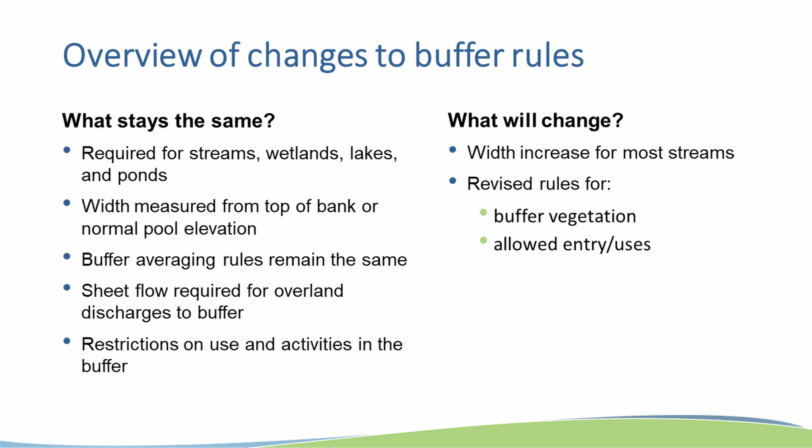And there are still restrictions on the use and activities that are performed in that buffer. So as a designer, it's important that you understand those restrictions and uses so that you don't design something that would either not be approved at the local government design approval level, or would put the ultimate property owner in a situation where they've got to remove something you've designed if it's not caught at the local government level. So what's changing is there's a width increase for most streams, and we'll talk about that, and there are some revised rules for vegetation and allowed entry and uses.

So the buffer width has a purpose, and the permit talks about the purpose being additional water quality protection, stream bank and shoreline stabilization, and canopy protection or shading of the stream. That's what the MS4 permit that our local governments are complying with need to pass through to developments, new developments and redevelopments over an acre.

So all water body types now have the same width requirements. In the past, we had a different buffer width for a wetland than would be on a stream. That's no more. They all have the same width requirement.

The difference now is whether the water body being buffered has been designated by the state of Tennessee as having available parameters for siltation and habitat alteration, meaning it's got good water quality, or unavailable parameters for siltation and habitat alteration, meaning it's got poor water quality or it's impaired, the 303D list. It's an impaired stream.

If it's also an exceptional Tennessee water, meaning it's a very high quality water, they're treating that as in need of an additional buffer as well, because they want to keep it a very high quality water. So if you're good quality water and not listed on the 303D list, you've got a minimum buffer width of 15 feet, but your average buffer width needs to be 30 feet. Double those for impaired streams and very high quality streams: a minimum buffer width of 30 feet and an average width of 60 feet, okay?

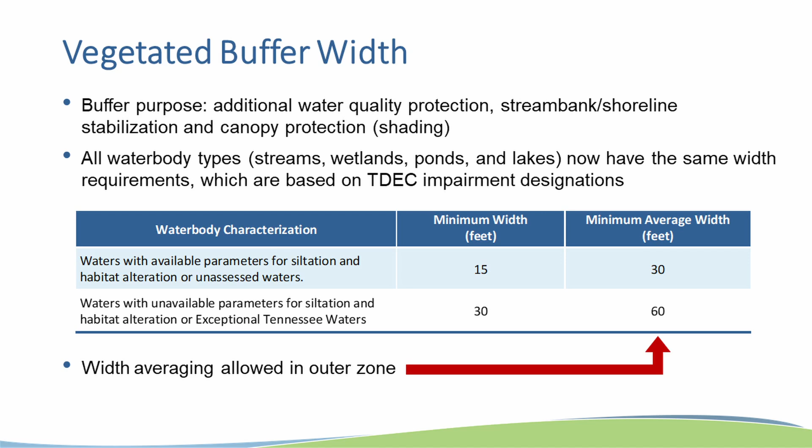So some of the communities here, I think we're at 50, we've gone up to 60 now. But you have to know the designation by the state, whether it's designated as impaired, exceptional, or not designated at all, to understand your stream width, okay?

Width averaging is still allowed, but only in the outer zone. So if I'm buffering a creek that's impaired for siltation, I can't have a buffer that's less than 30 feet at any point. My buffer can be less than 60 feet as long as the average of the outer zone is 60 feet, okay? That looks like this.

Let's say this is an impaired stream, and I've got my inner zone of 30 feet—you can see the width there, 30 feet. But I've got an office building, and I want to use as much of this as I can, so I've got an outer zone that needs to have an average of 60 feet for the whole buffer. So I bring it way out here and then push it in down as close as I can to that 30 feet, but not going on it. So the average of this buffer width is 60 feet through there, okay?

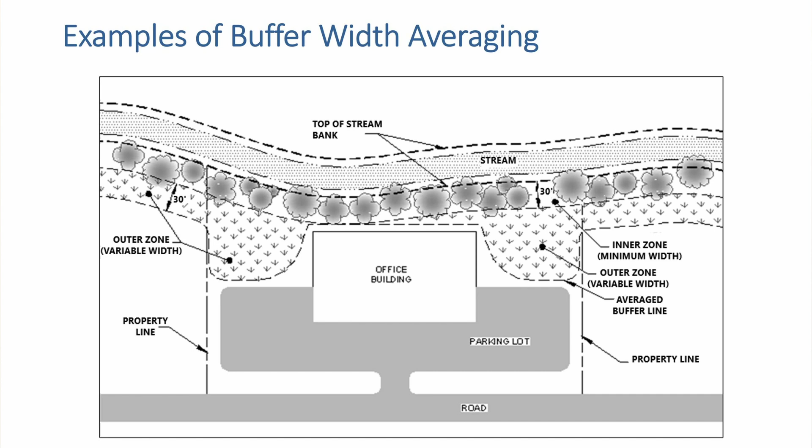That's how you manage the averaging. And this is what that might look like in a residential subdivision. It's not lot by lot the average, it's the whole subdivision that is averaged to buffer the creek, okay? So these lots may have more buffer while these don't have any, except for the 30 feet behind the house, okay?

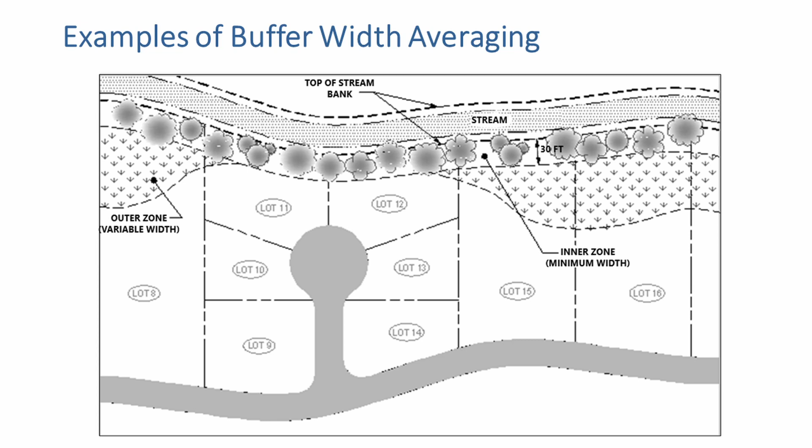Just like in the past, we want to minimize the impervious surfaces in the buffer. There are some allowances, certainly for utility pads, for bridge crossings, stream crossings, roadway crossings. Trails are allowed, sidewalks, but if it's paved, then you have to increase the width by the width of the pavement you're putting in there, the trail. So say you put in a 6-foot width trail, you've got to add 6 feet to your average width, okay?

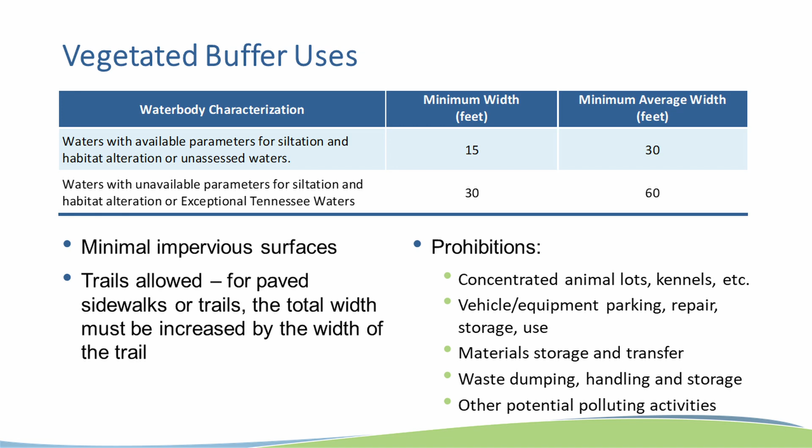The prohibitions in there are consistent now for each of the 4 communities in the room here. A lot of these were already in there—we might have reworded for you—but we don't want things in there that are going to impair water quality. So things like a commercial kennel or a feedlot or parking. So when you're designing these sites, just remember that when you're in the buffer, you really don't need to be putting impervious area there unless it absolutely cannot be avoided. And if it can't be avoided, you need to talk to your local government about what you're doing.

The buffer vegetation standards at the state level have relaxed. I think this is a good thing. In the past, it was, we want you to stay out of it completely—it's an unmanaged area, an unmanaged zone, just don't disturb it at all. And now what the state wants is that the inner zone should have predominantly trees, okay, and the outer zone should be predominantly herbaceous vegetation.

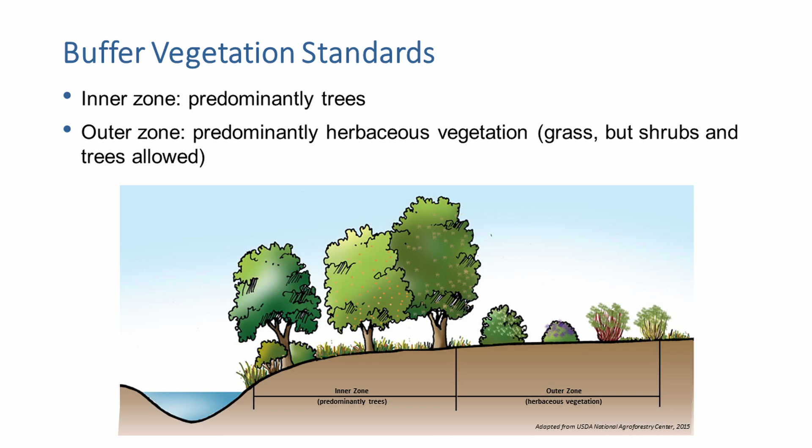Grass, shrubs, and trees are allowed as well. But we want to minimize erosion, we want to shade the stream—those are the things that we want to do. So we're no longer requiring you to keep a really woolly, unmanaged look behind your buildings. You can clean up those water quality buffers, make them an amenity, make them look nice. We're just looking for trees in the inner zone and herbaceous vegetation at the outer zone. So you can still landscape and all of that sort of thing.

Anything else on buffers? Okay.